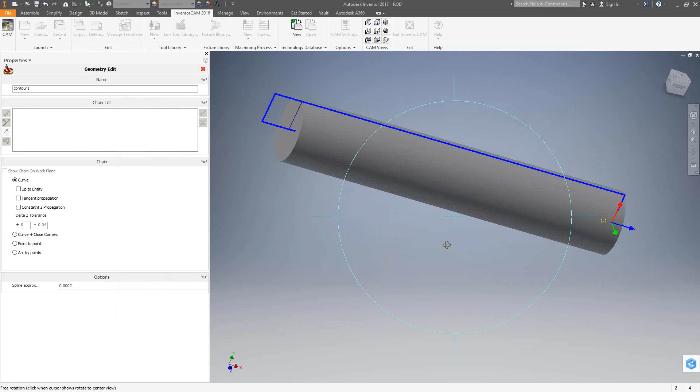The workflow for the InventorCam toolpath is the same as all the other ones. We're going to start with the geometry. So I'm going to go to New Geometry, and we're going to do a part off. So I need to rotate this part around to get this edge right here, this line. This line represents where I'd like to take my part off tool and engage the material. So I'll just click on the green check mark there. As we've seen before, we'll go to Modify Geometry and make sure I auto extend to the start and the end. Click on the green check mark.

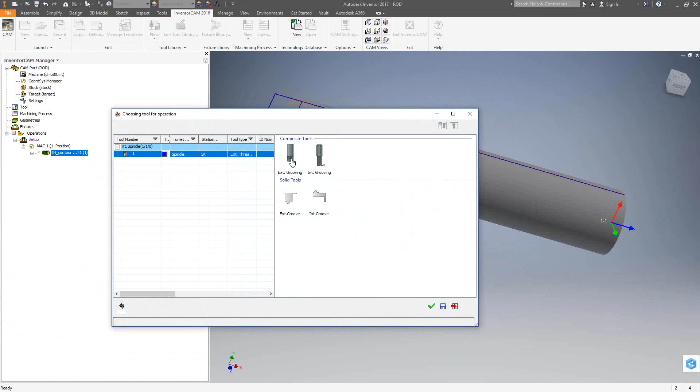We'll go to our tool, click on Select, and I'm going to add a tool, and I'm just going to choose this grooving tool. Now, I could define this tool to make sure that I have enough reach on my shank to make sure I can reach to the center line. But if I'm reasonably sure that the part is set up correctly, I'm just going to choose Insert Only, meaning that I just want the tool to be represented. I'm not going to do any collision detections against the shank. Click on green check mark, make sure that's mounted correctly.

Levels is the safety distance away from the updated stock. Technology is where we have the main parameters of this toolpath. In this case, we can do a part off externally or internally. Tool side is which side of the geometry that I chose we'd like the tool to do the machining. So in this case, with the XZ plane as such, left side means this side of the chain. So we'll say left side. But we have the options of right or middle.

Step down. With any type of grooving tool, you'll see that you have constant or single. In this case, we're going to go with single. We're just going to do one pass, and we'll actually control that using the grooving parameters. Okay, so release after cut, and the offset Z is if I want to leave some material on the part as it does a part off. So let's say we leave about 10 thou material so that when I flip this around, I can face off the part.

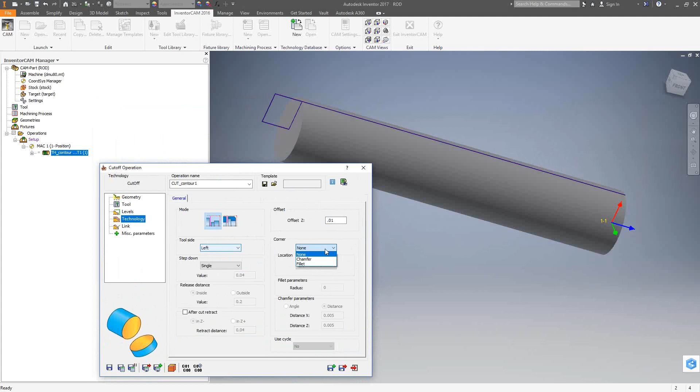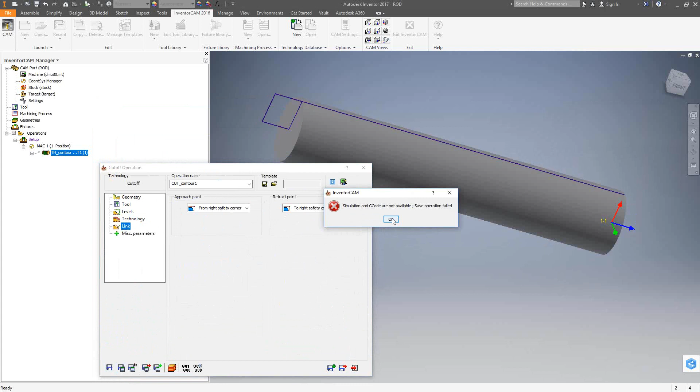Corner allows me to add either a chamfer or a fillet on the edges before I do the part off. So let's say we add a chamfer, and then we get the chamfer parameters over here. I'm just going to say 45 degrees with a 5 thou Z distance. Link is just the approach points. If I do a save and calculate, again, when I define the tool, I'm just going to make sure that it matches this material and this machine. So I'm just going to put in something very small, do a save and calculate.

And if we take a look at this, before it does the actual part off motion you see there, there's one little pass there that's adding a chamfer. Now you see it does it only on the one side. If I go back to my technology, I'm going to say not just on the left side, so the part that remains in the chuck, not on the right side, not the part that I'm about to take off, but on both. And you'll see that in the bottom left corner. So left side would have been the part that remains in the chuck. Right side is the part that's about to be parted off, or both. And as I do that, do a save and calculate, and you'll see that it generates a toolpath that does a chamfer on both.

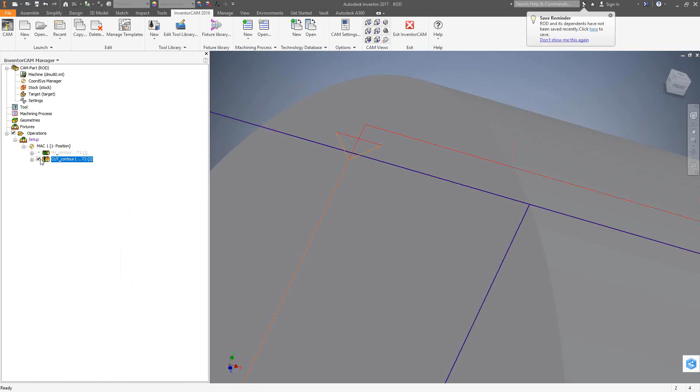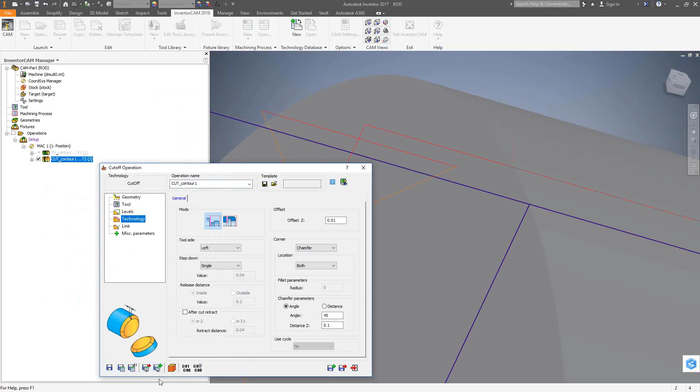If we take a look at that inside simulation, play that through. If we zoom in on the parted, let's actually put in a larger chamfer so we can actually see that. And I'll slow that down so we can actually see what it does. So it just machines a little bit of material, and then it does the chamfers on both sides before it does the part off. Now my graphics card, I could probably step it up a little bit so we can actually see that better, but you can see that it adds the chamfer there.

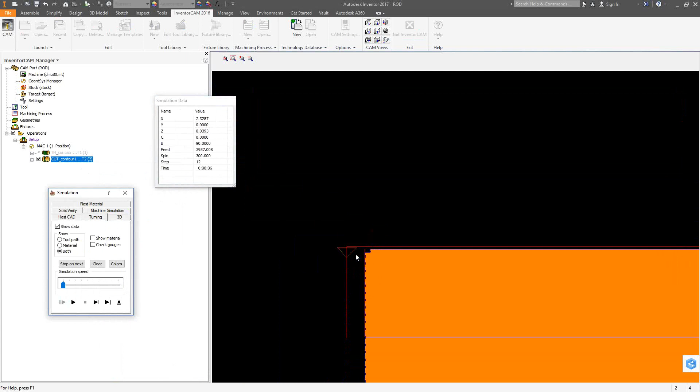So essentially all this part off really is just for removing the part from, let's say, a piece of bar stock that is still in the jaws.